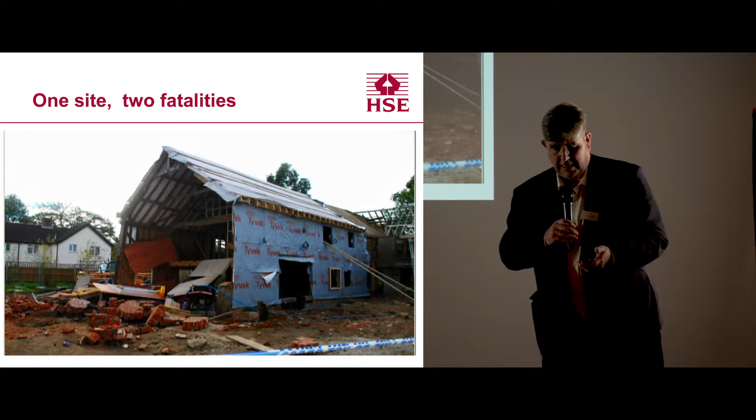This is a scene of disaster. A few years ago, a rural location, two people died. It's a conversion of an agricultural barn, a gable end wall that fell. The real tragedy is that the risks about that wall were known at the beginning of the project and simply not communicated through to the workers.

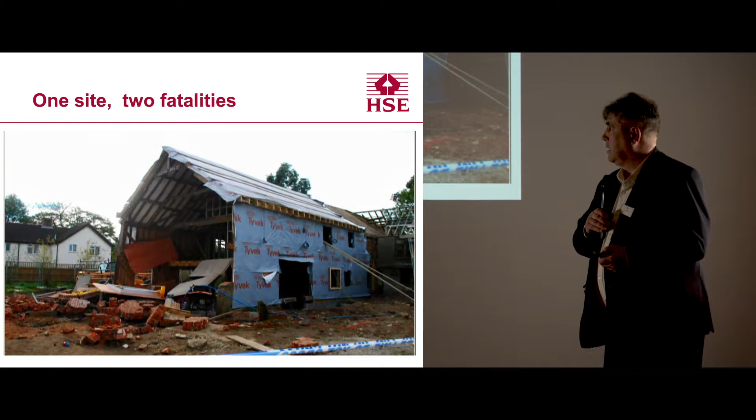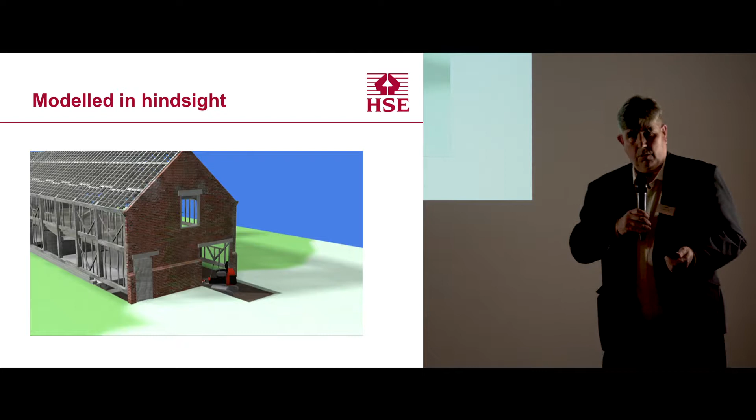Interestingly, HSE is not known for its modelling capacity, but in this case we did create a model and an animation which was used in court. I thought you might be interested to see it. I don't know if we can play this video.

Based on the information gathered and the debris pattern, the likely failure mode of the wall can be demonstrated. The section of wall to the south of the large opening slipped into the void above the previously cast base at the southeast corner and the newly excavated trench along the inside face of the wall. Once the wall section reached the bottom of the trench, the wall then rotated outwards, causing the lintel over the opening to hit the excavator.

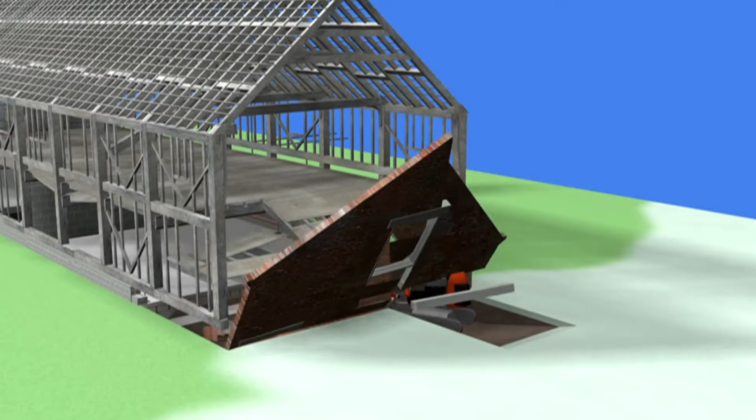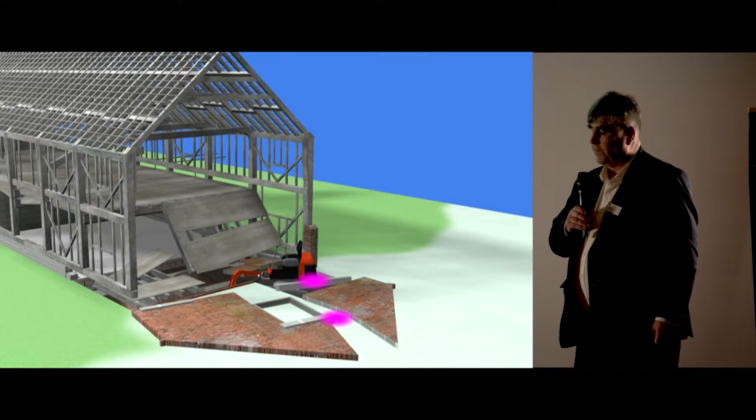Kevin Ruffles was found near to the excavator. Matthew Skeet was close to the fence line. We modelled the mode of collapse of the wall to show to the jury what happened, what the risk factors were, and exactly how this tragedy unfolded.

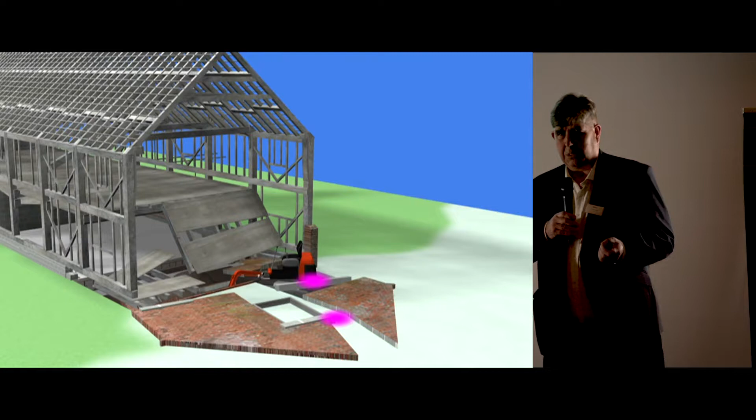And of course, in doing that, we were modelling in hindsight, with the value of hindsight. My key message to you really is use models in foresight. And that's, I think, a really important message, and it will save lives.

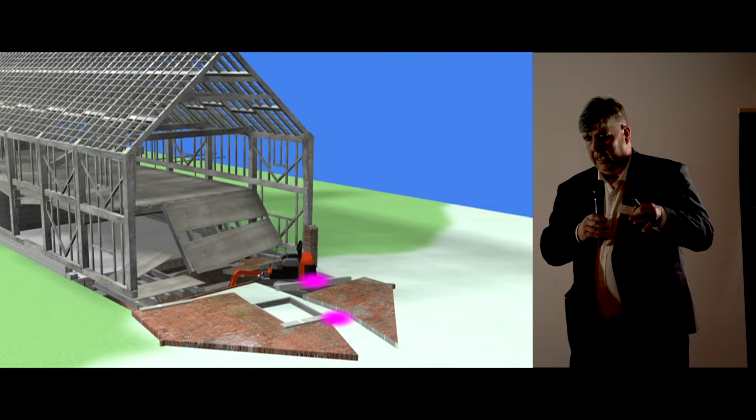It's actually our conviction in HSE that the digital tools associated with information modelling offer us the opportunity for a breakthrough in health and safety in accidents. The reason for this is because we believe that in the design phase, better modelling, better collaboration will drive down risk and increase certainty, so that designs are presented to contractors in a far better state to build.

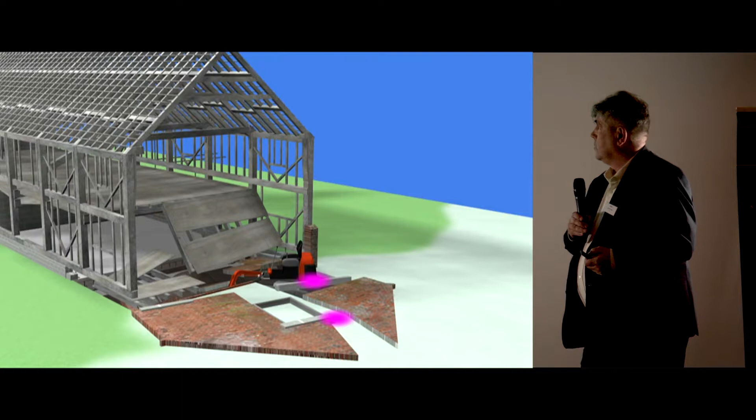So I hope that's got across. Now, just looking, what is this foresight thing that we're talking about? Just to use an example, from the BIM model, the big picture, you can zero in on a particular issue. You see it in the middle there, you've put a red line around it, that's an open stairwell.

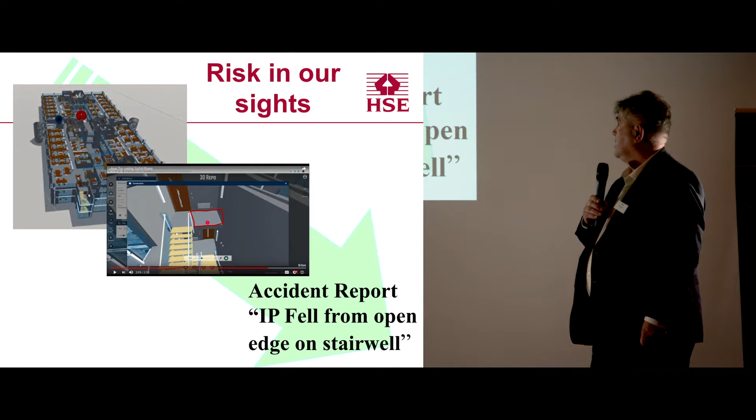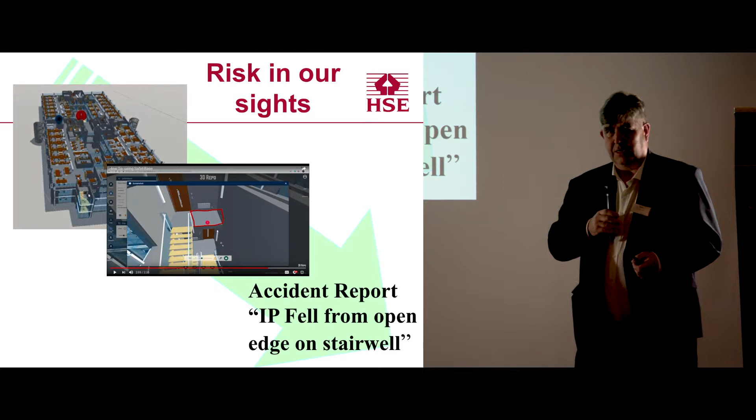What you're aiming to do is to prevent that accident report from happening. So this is what we're basically saying: using 3D models to improve the conversation about risk that happens, and enhance the ability of people to foresee and manage risks.

And crucially, it's the first opportunity to spot the risk that's really important - so dealing with risk not at the site end, but actually during the design phase.

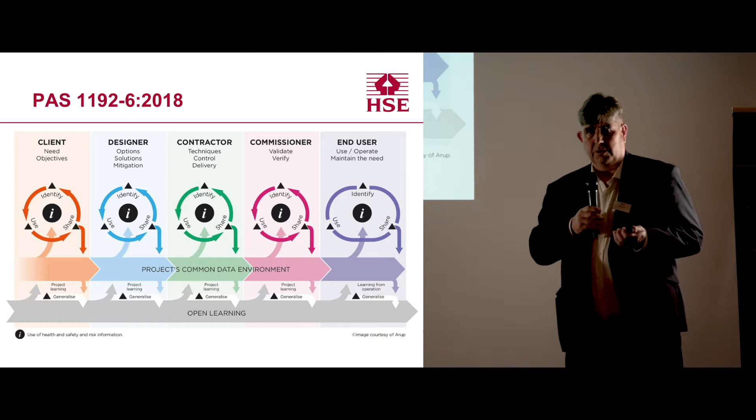We need to have access to open health and safety data so that people can learn more dynamically and more rapidly about risks and how to control them. And so that's part of our vision going forward.

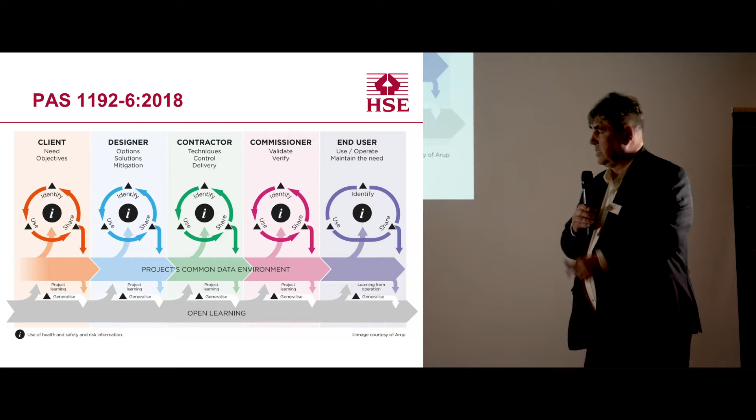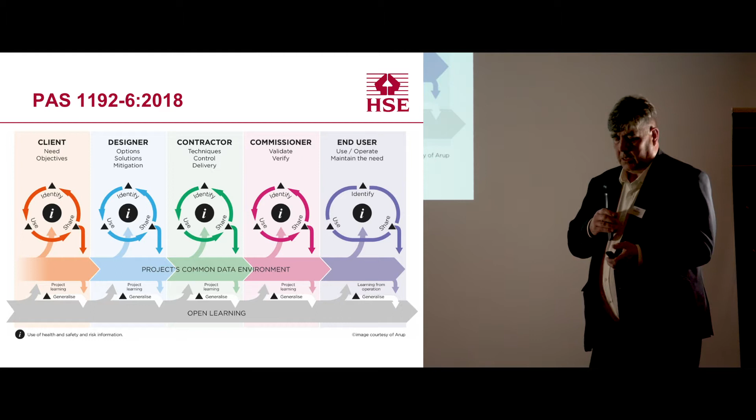The second thing is it's easy to look at that diagram and read it across as a narrative from left to right and think phases, think a sequential thing that's happening. Actually, the way this PAS was written was the design phase should be collapsing all of those things. So the design should be benefiting from collaboration with end users, commissioners, contractors, constructors, in order to make sure that the information available in the design is as complete as it can be. I guess part of what we want to see is more design being done early, in fact more investment in design, and less uncertainty being passed on to contractors.

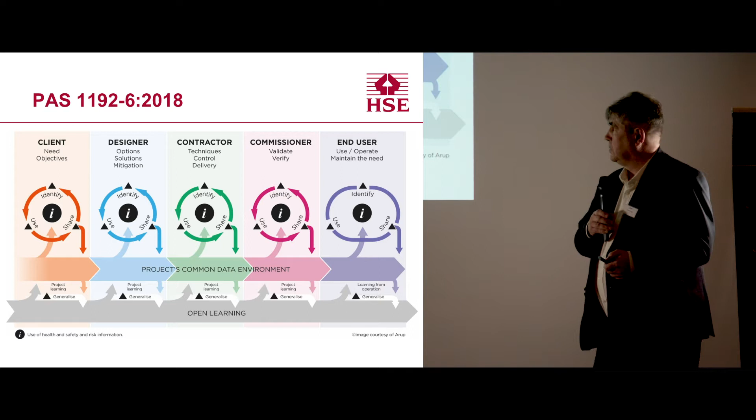So one of the techniques we really like is 4D modeling. There's a clause in our regulations which talks about clients and principal designers having to take account of stages and sequences of work. And the 4D modeling technique offers massive promise, and I think we're only scratching the surface of what we might be able to do in the future with 4D modeling in terms of linking health and safety risks to programs and so on. So I think this is really important.

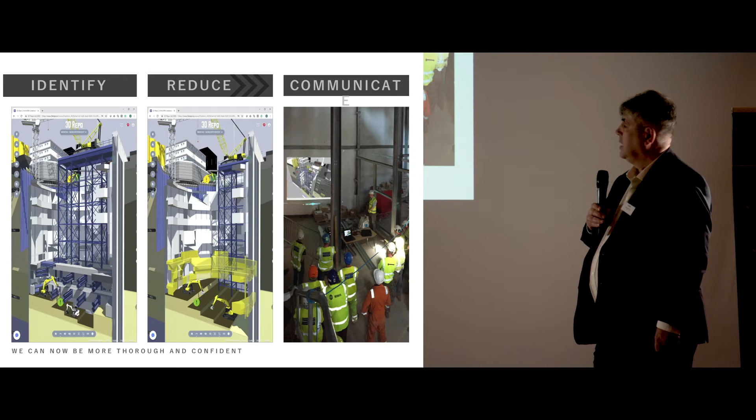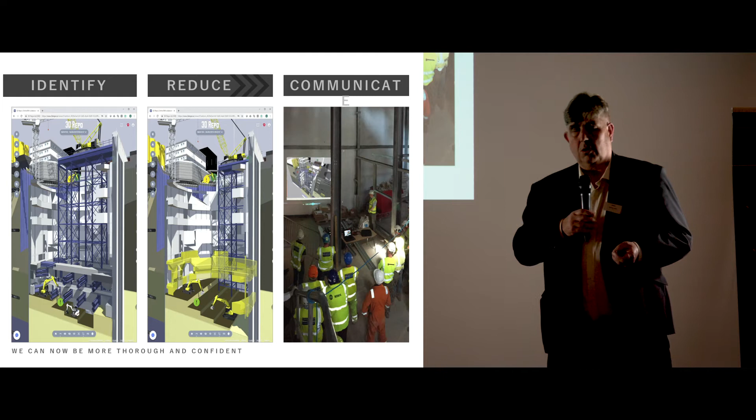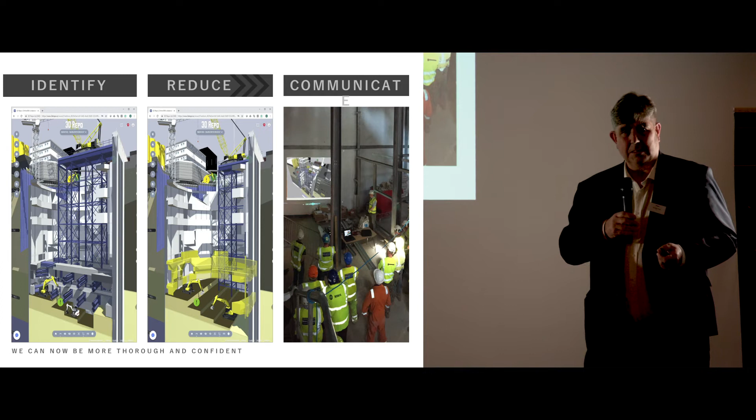A second workable design was produced, which improved things, reduced the risk. But then crucially, the last thing, the communication happened. And so through workshops, you're passing information forward. So any use of modeling tools, I think to be effective in this world of CDM, needs to involve collaboration between the different parties. Early contractor involvement in design and constructability reviews is really crucial.

Producing, some people call it Hollywood BIM, but basically what they're saying is by producing things in detail and accurately, they're actually able to feed forward information to the constructor. One of the exciting things about this is not just the detail and the amount of work that's gone into actually modeling that scenario, but that the information is then used.